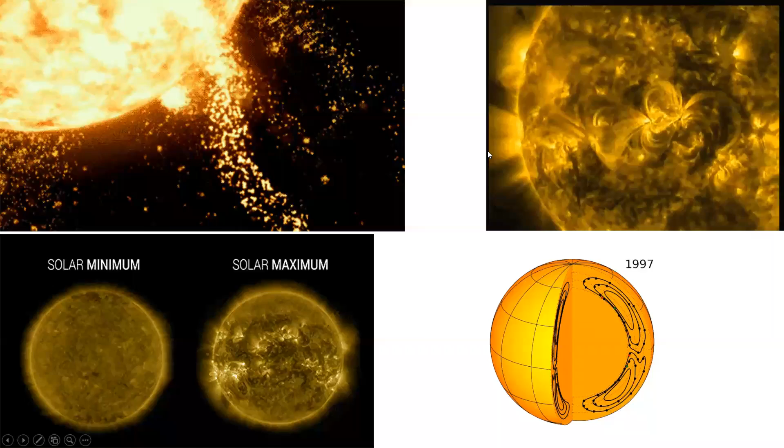Water is the only agent which can exist in all three phases, either in the form of a liquid, a gas, or solid ice. Knowing this up to this extent, let us see the next slide. The structure or theory will not be restricted only to the water bodies on Earth. We can extend this theory even to the extent of the sun.

In the top left corner, you can see that the sun is very active and has energy which is emitted at quite high speed. The CMEs, coronal mass ejections, which are emitted by the sun move at about 700 kilometers per second and reach even to the extent of Pluto. The Earth is the third planet from the Sun, after Mercury and Venus, at a distance of about 150 million kilometers on average. The Sun emits radiation, and that radiation travels beyond the heliosphere.

It possesses highly energetic particles like electrons, protons, helium nuclei, iron, and some lighter elements. It also possesses electromagnetic radiation of different wavelengths, a different spectrum, preferably visible, ultraviolet, and others. Thanks to the atmosphere, which protects from the ultraviolet radiation by interactions, it allows mainly visible radiation to reach the surface of the Earth, making the Earth a beautiful planet for life to exist in this universe. Of course, we can restrict this study to the solar system to a great extent.

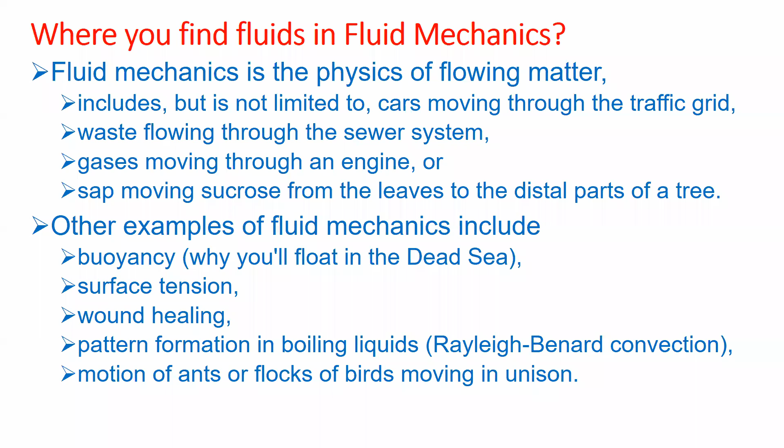Just think. The motion of ants, or even flocks of birds moving in unison, is a kind of fluid. These are all some of the examples to make you comfortable with it. Why we study this in physics is because physical laws govern them. If you go still further, fluids have a bad reputation. Why? Because their detailed behaviors and characteristic properties are governed by the Navier-Stokes equations, which pose great mathematical difficulties. Once you bring mathematics into physics, people will run away.

I'm not saying that it is impossible. We are bound by the academic syllabus, and there is no choice for you also. You have to listen to me till the end of the semester, whether you like it or not, that's a different issue.

Stay happy. It is often unnecessary to solve these equations to obtain great insights into the behavior of fluids, because it is not required, but we can make approximations. One can often make progress with the right set of approximations, there is no doubt. To start, let's analyze the mechanics of a very simple problem, maybe a problem similar to the floating of a fluid or a liquid on some surfaces.

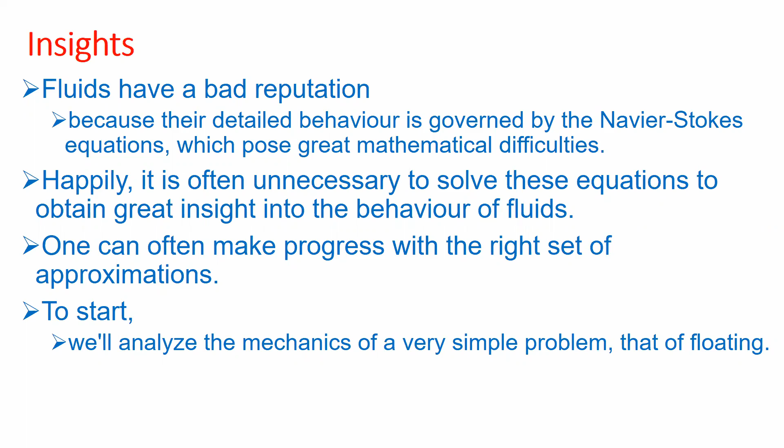Fine. I hope you are able to see the screen and able to hear my voice? At least one response. Yes, sir.

The branch of mechanics that deals with bodies at rest is called statics, while the branch that deals with bodies in motion is called dynamics. Fluid mechanics which deals with fluids at rest is known as fluid statics. A fluid in motion is known as fluid dynamics. Don't get confused.

And the interactions of fluids with either solids or other fluids at the boundaries. This is a boundary. When they meet a boundary, some interactions will happen. Fluid mechanics is also referred to as fluid dynamics, by considering fluids at rest as a special case of motion with zero velocity. If the velocity is zero, then the fluid is said to be at rest.

Then we have water in a cup, maybe water in a bottle, maybe water in a pond, maybe a lake. But not water in a river, a canal, or an ocean, of that kind.

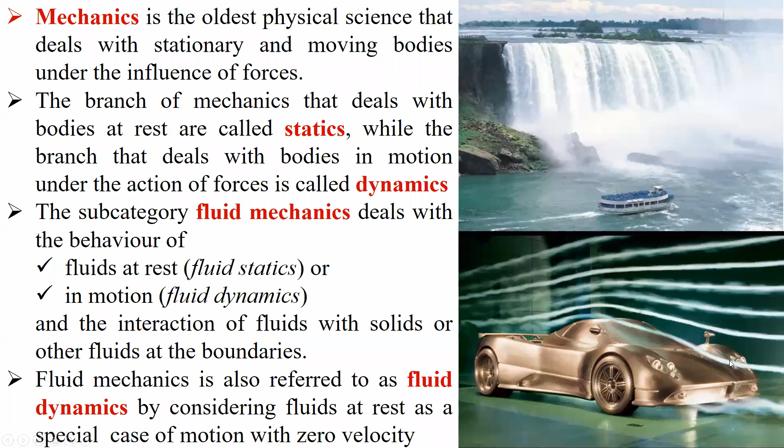Fluid mechanics deals with the behavior of fluids in general, that is either liquids or gases, at rest and also in motion. It is basically a study of the physical behavior of fluids and fluid systems, or the laws which are

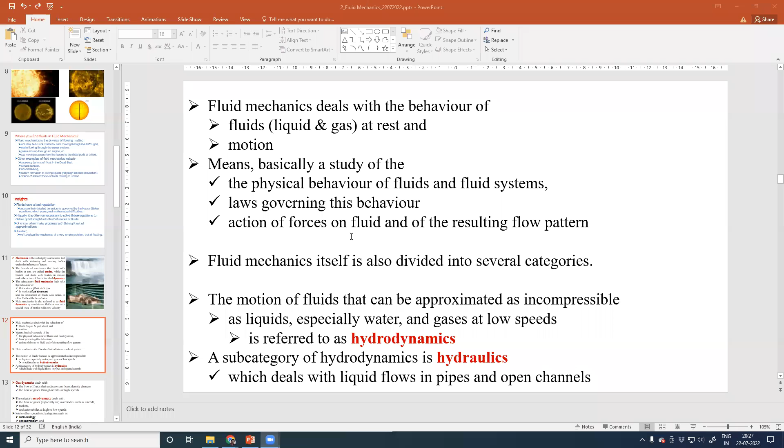Basically this is a study of the laws governing the behavior and movement of fluids, either at rest, though if they are at rest we can't call it movement, or in motion, including systems of that kind. The action of forces on fluids and the resulting flow pattern. Fluid mechanics itself is divided into several categories that we'll see later.

The motion of these fluids can be approximated as either compressible or incompressible. It is very difficult to compress liquids, especially water, or even some gases at low speeds, which is referred to as hydrodynamics.

A subcategory of hydrodynamics is known as hydraulics, which deals with liquid flows in pipes and in open channels. Open channel means a channel which can take water from one place to another. All rivers have channels, left channel or right channel, left bank or right bank we can call. Water will be released.

Now it's the monsoon season. If the reservoir gets filled up to a great extent, water will be released from the dams or check dams or reservoirs. They can't hold the water beyond a great extent. This dynamics one has to understand.

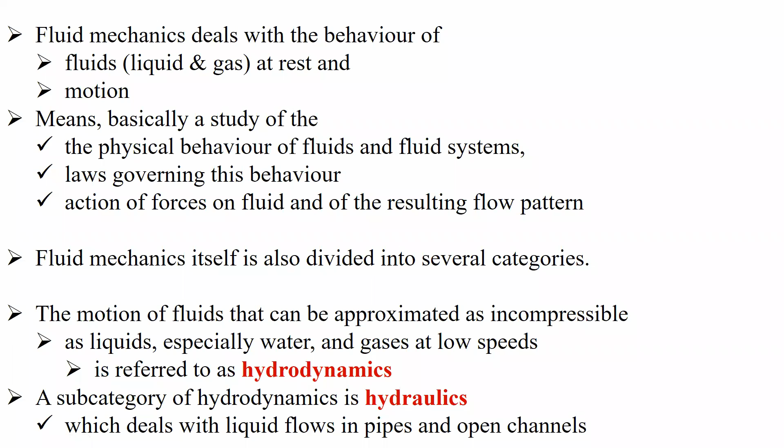Of course, during construction of dams, channels, canals, reservoirs, and pipelines which take water from one place to another, either for Kaveri or Kabini or whichever river, or the particular parties trying to take water from one place to another, it is the same case. They might not have understood physics, but at least they know that.

Gas dynamics deals with the flow of fluids that undergo significant change in density. If the density changes, a mass of solid becomes liquid, and liquid becomes gas, or maybe the reverse. A solid may directly be converted into gas, like camphor, or solid ice may be converted into water vapor.

The flow of these gases through nozzles at high speeds makes gas dynamics. For example, if you allow water vapor or any kind of vapor through nozzles, it uses a huge amount of energy.

The category of aerodynamics deals with the flow of gases, particularly air, over bodies such as an aircraft. In the last picture I showed that for the car. Maybe a rocket has to go through the atmosphere. Aircraft will be within the atmosphere, and automobiles at high speed or even sometimes low speeds undergo all kinds of aerodynamics. You can't take deviation wherever you want.

Other specialized categories include meteorology: you get rain, winter, summer, a hazy or cloudy morning, clear sky in the afternoon, fog in the morning, wind in the evening. All these within meteorology are the flow of fluids, particularly water and its vapor in the atmosphere. Oceanography: oceanic water is not stagnant.

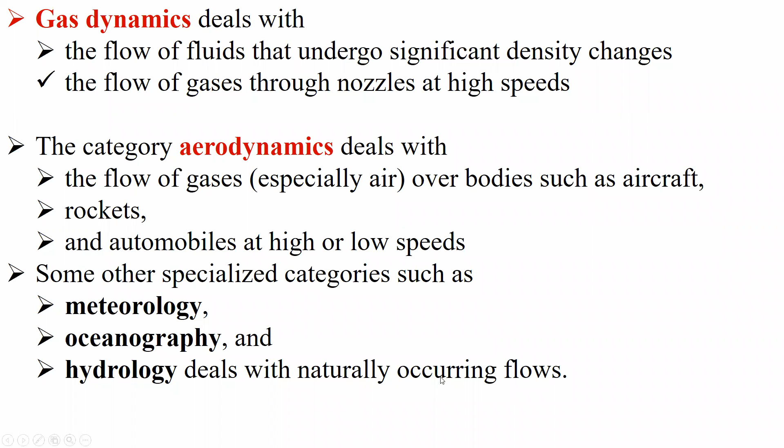Entire oceans are moving from one point to another, like the Pacific Ocean, Indian Ocean, Red Sea, Arabian Sea. They make convection and transport energy from high to lower energy, either in terms of temperature or from higher gravitational potential to lower gravitational potential, which makes it dynamics. Hydrology and these three branches deal with naturally occurring flow of fluids, preferably water.

Stress is the one from the force you apply; strain is either elongation or compressional stress. Here, shear happens when tangential stress is applied, and the body starts deforming continuously as long as the shear stress is applied. Shear stress means the bottom panel is moved towards left and the top panel towards right, or the reverse: bottom moved towards right, top moved left.

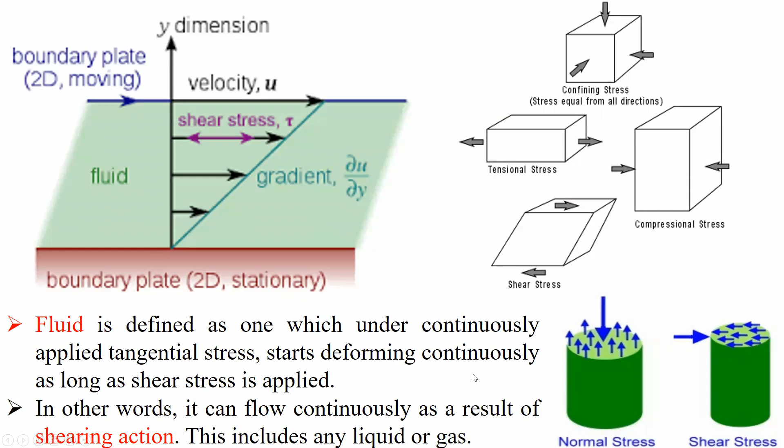A solid can resist the applied shear stress by deformation, but a fluid deforms continuously under the influence of a shear stress, no matter how small. That's why in solids, stress is proportional to the strain, but in fluids, stress is proportional to the rate of change of strain, the strain rate, as they call it.

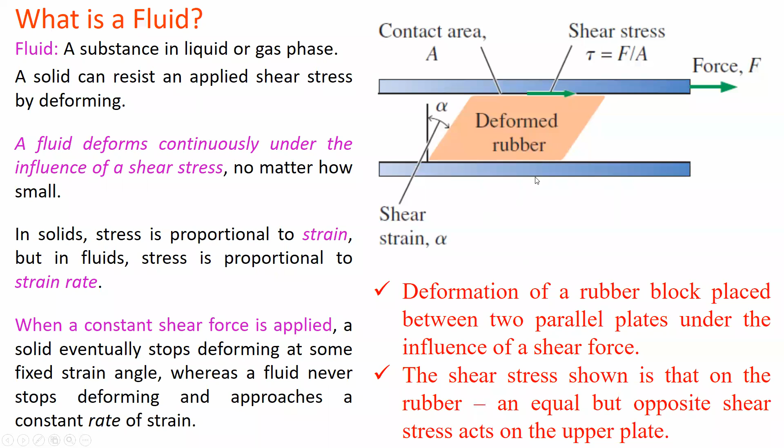When a constant shear force is applied, a solid eventually stops deforming at some fixed strain angle, whereas a fluid never stops deforming and approaches a constant rate of strain. This shows the deformation of a rubber block placed between two parallel plates, shown in blue, under the influence of a shear force from the top. The shear stress shown is that on the rubber; an equal and opposite shear stress acts on the upper plate. That is the example.

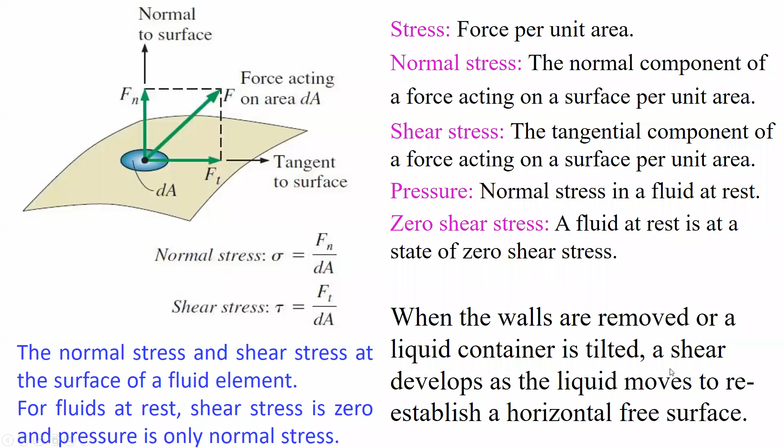When the walls are removed or the liquid container is tilted, a shear develops as the liquid moves to re-establish a horizontal free surface. See that this is a free surface, liquid is there. If there is no surface, it acts like a boundary. Molecules of gases will move randomly. This is the dynamics happening in the gas. The same dynamics may also happen in liquid, provided they possess some energy. This is only an example. You can go through it, no issue at all.

That is why if people change their mind from time to time without having a constant thought, instead of fluidity, they will call it stupidity. But we should not behave like stupid people of that kind.

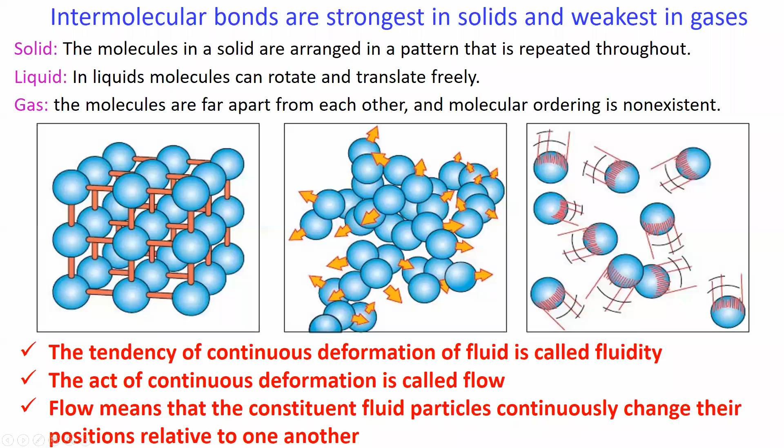The act of continuous deformation is called flow. Flow means that the constituent fluid particles continuously change their position relative to one another. It is changing from point to point here, which you can refer to wherever you wish.

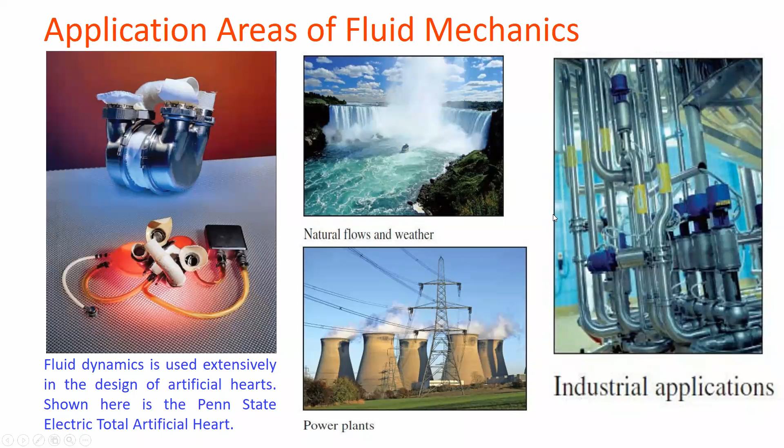Water is flowing naturally. Same thing, power plants work on fluid dynamics. Industrial applications, where fluid like a hot gas moves from the turbine to the rest of the parts; hot and cool junctions they can make. Wind turbines, piping and plumbing systems also work on fluid dynamics.

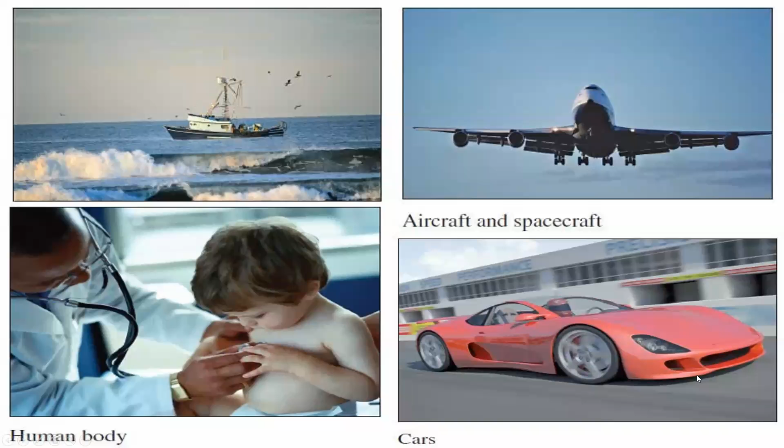Aerodynamics, human body temperature works. Blood in a vessel moves because of fluid dynamics. Aircraft and spacecraft, both within the aircraft and outside, should be worked out. High-speed cars and high-speed ships move because of fluid dynamics. Maybe an acrylic paste coming out of a tube is fluid. This is the same thing.

Maybe even a fire extinguisher, water coming out of a pipe, any turbines, even pumps, that is because of the aerodynamics. A rocket, sorry, an aircraft, high-speed trains, submarines, nuclear warships are working on the concept of fluid mechanics. See that the water is flowing. Okay, this is mainly because of that. We should understand this in a better way.

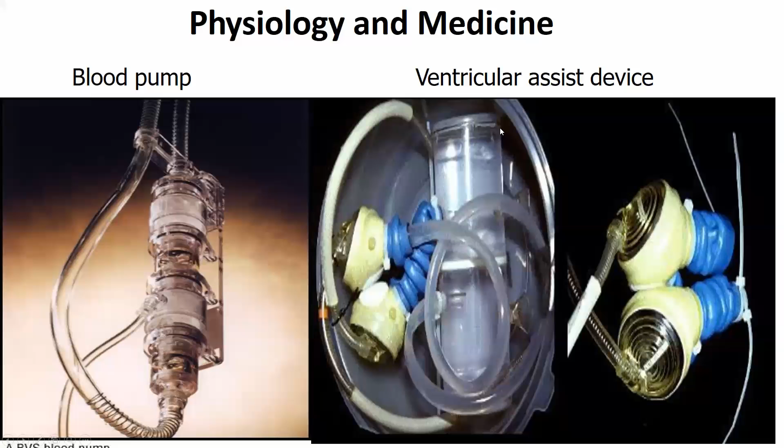Even physiology and medicine: blood pumps, ventricular assist devices. Some examples I'm saying, just remember some of them. Water sports, cycling, offshore racing, surfing over the water body, even cricket, swinging of the ball towards left or right, where the batsman may not find the path; the way the bowler bowls depends on fluid dynamics. Even racing cars, auto racing.

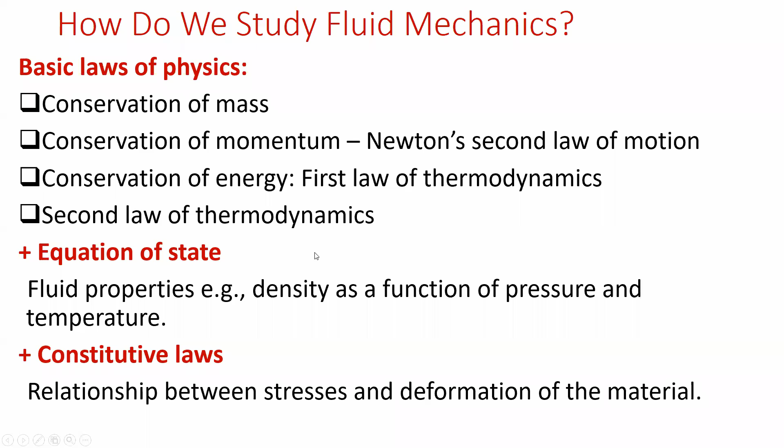How do we study fluid mechanics? By following basic laws of physics, like conservation of mass, conservation of momentum, Newton's second law of motion, conservation of energy, second law of thermodynamics, plus the equation of state and constitutive laws which govern those things. Because we are bringing mechanics and physics to a greater extent. I will repeat this slide on Monday. It goes with the ideal gas equation.

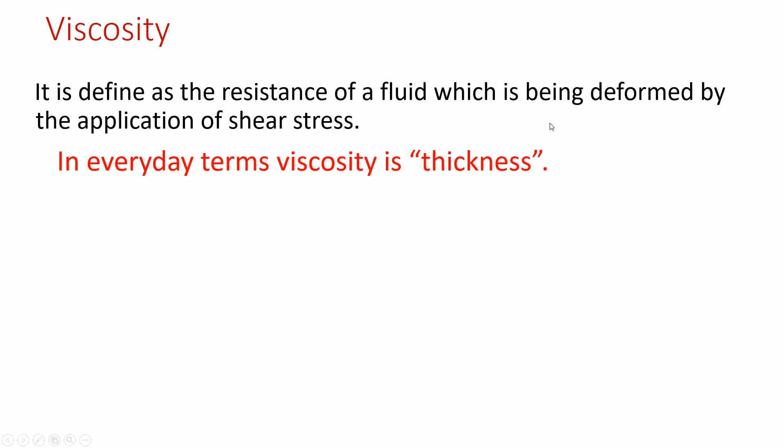How do we study fluid mechanics? Rho is equal to PM by RT, and Newton's law of viscosity will also come into the picture, where dynamic viscosity will be involved. Viscosity is defined as the resistance of a fluid being deformed by the application of shear stress. In everyday terms, viscosity is nothing but thickness of the fluid. Thus, water is thin, having lower viscosity, while honey is thick, having higher viscosity.

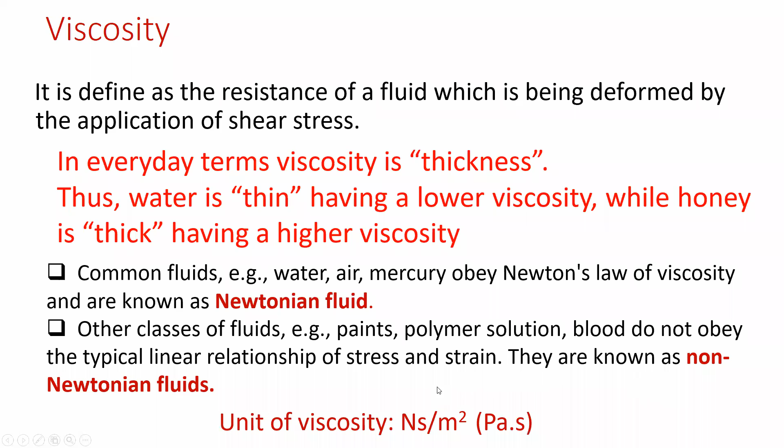Common fluids, for example water, air, mercury, which obey Newton's law are known as Newtonian fluids. Other classes of fluids, for example paint, polymer solutions, blood, do not obey the typical linear relationship of stress and strain. They are known as non-Newtonian fluids. The unit of viscosity is Newton second per meter square, or Pascal second.

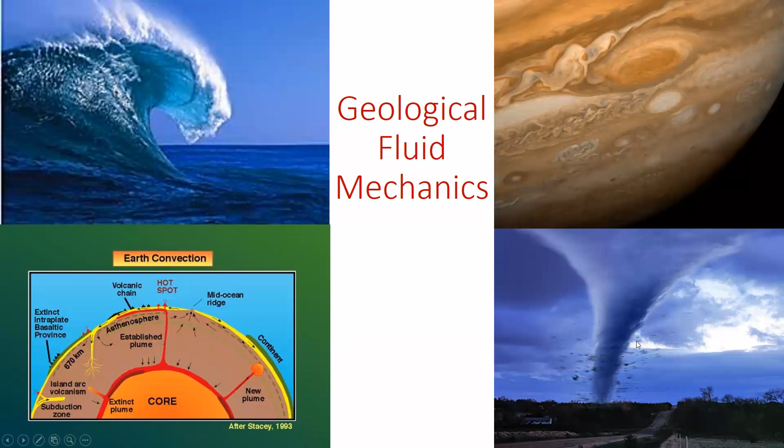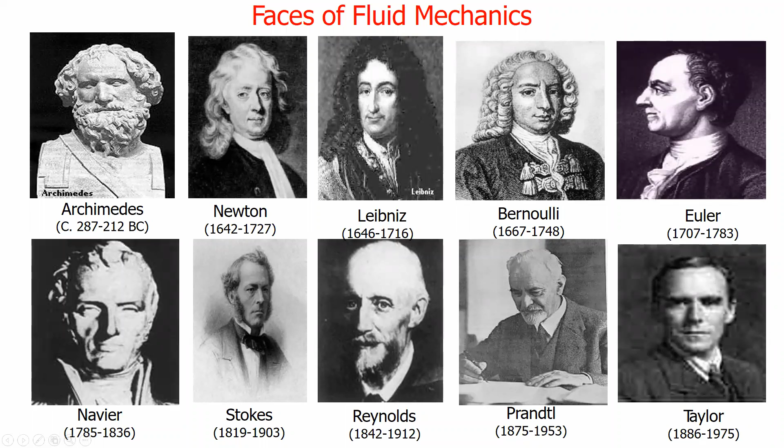Faces of fluid mechanics. I want your photograph in the third row, third column. Archimedes, Newton, Leibniz, Bernoulli, Euler, Navier-Stokes together, Reynolds, and Taylor. They are all people who have worked from almost 287 BC to 1975.